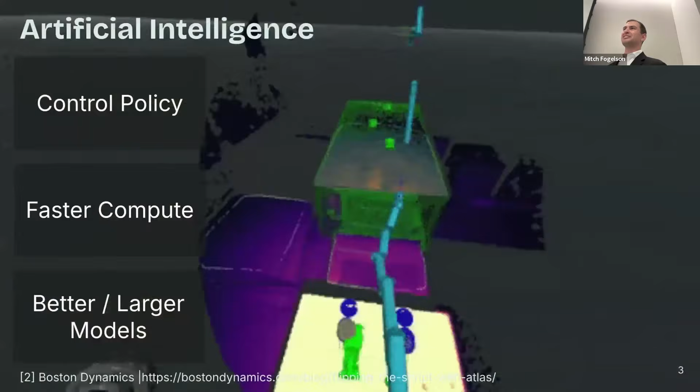I'm going to show you my favorite biological inspiration video of this fish swimming upstream. Now, the kicker is that the fish is dead. There's no control policy, there's no actuation, there's no models. And yet this amazing behavior emerges from its interaction with the environment. This is what I'll refer to as physical intelligence. These behaviors emerge from geometry, structure, and composition for animals to be able to be efficient and achieve these incredible feats.

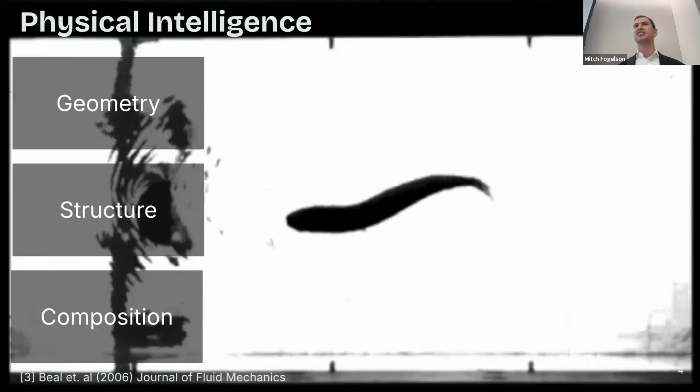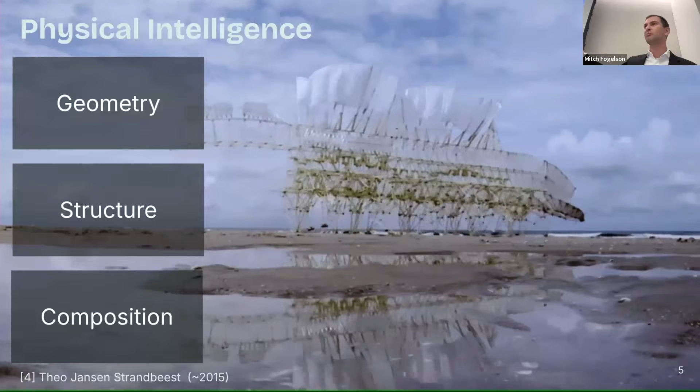One amazing example of this physical intelligence is realized through Theo Jansen's walking sculptures, the Strandbeest. These are systems that are powered only by wind, but effortlessly walk across the beaches, which is still an advanced problem for robotic systems today. They achieve this through these amazing linkage systems that effortlessly and naturally create these gaits that are able to traverse this difficult terrain.

Now, as I mentioned, physical intelligence is only half of the story. When we combine physical intelligence with artificial intelligence, like the Salto robot developed at UC Berkeley, we can see these systems jump to new heights, bounce off of walls, reorient themselves mid-air, and land with precision.

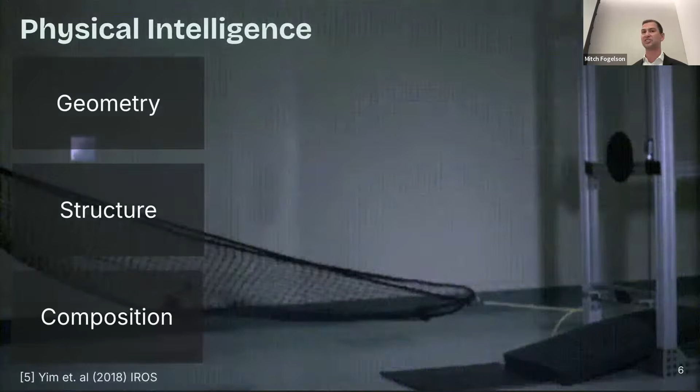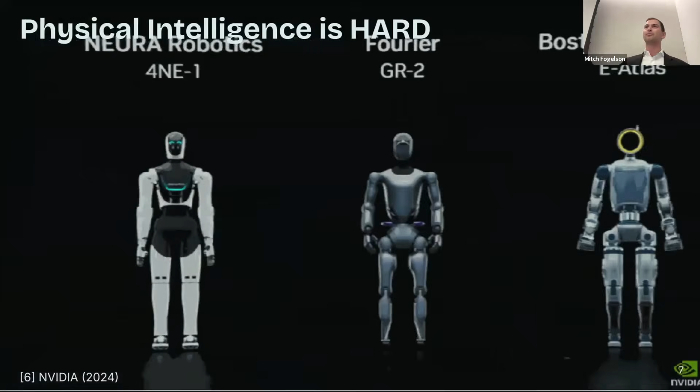So why don't we see more interesting and diverse sets of robotic designs in the real world? Why is everyone converging to these simplified forms of humans and dogs? It's because physical intelligence is hard. The composition of the structures and the boundary conditions that they provide create challenges for engineers to develop these systems.

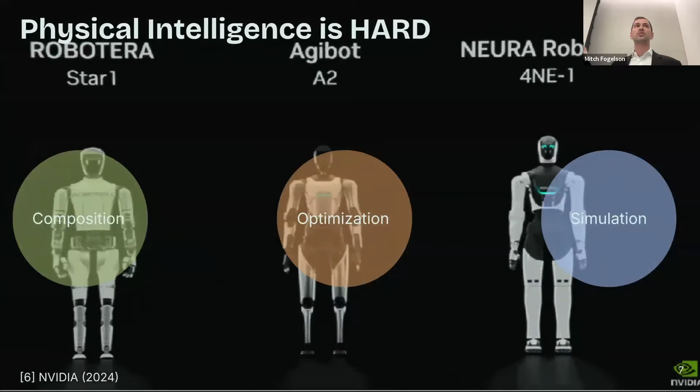The optimization algorithms that we have don't scale well to the high dimensional design problems that persist. And the simulation tools that have been developed can only support these simplified robotic models, and so they can't handle the complex designs from the Salto or the Strandbeest.

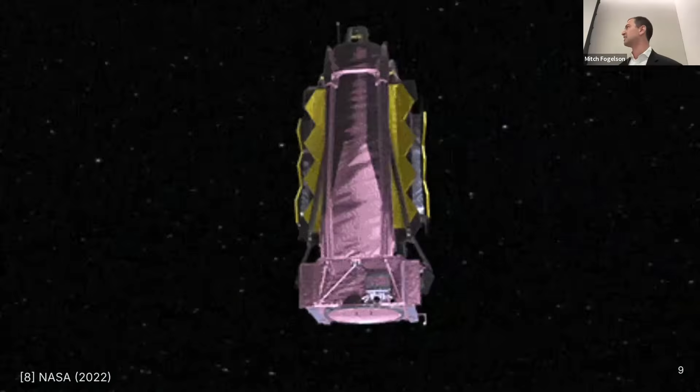Where we do see some interesting developments in physical intelligence is in the outer space realm, due to the harsh constraints and the specific tasks that we need. This is realized through the amazing development of James Webb, that deploys to the size of a tennis court, and its segmented mirrors and optical instruments deploy with precision using these linkage-based structures.

Now, it wasn't that James Webb came without any faults. There was tons of iteration and manual testing, making sure that all of these systems were going to succeed, as we can't have human intervention when we get into outer space. And even with all of this, there was over 100 single point failures that could have caused the mission to fail completely. The development of James Webb was 14 years over the timeline and $9 billion over budget.

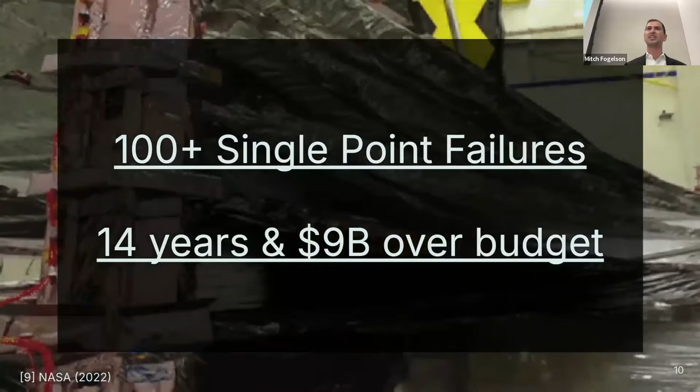So how can we get our space projects on time and under budget, and support the design engineers that are developing these next generation systems? That's where we'll be leveraging design optimization. These are tools where we leverage algorithms to be able to support the engineer in developing, testing, and analyzing structures that could be used for next generation systems.

We're going to leverage this kind of standard mathematical formulation to describe this broader set of problems. And I know everyone's eyes just glazed over when we added some math and there's no more videos. So let's walk through what optimization is together.

We're in effort trying to minimize or maximize some task, or goal, or objective. And in the real world, we have constraints. We have to obey the laws of physics or the design geometries. But we also have these knobs that we can turn to find these solutions. We've got continuous parameters, which are these smooth knobs where we can pick any possible value between infinite choices. And we've got these discrete parameters that make these jumps between different possibilities.

And so a lot of my family just came from Indianapolis and went to the recent Indy 500 race. So I thought I would ground some examples of design optimization in something that they might understand more clearly.

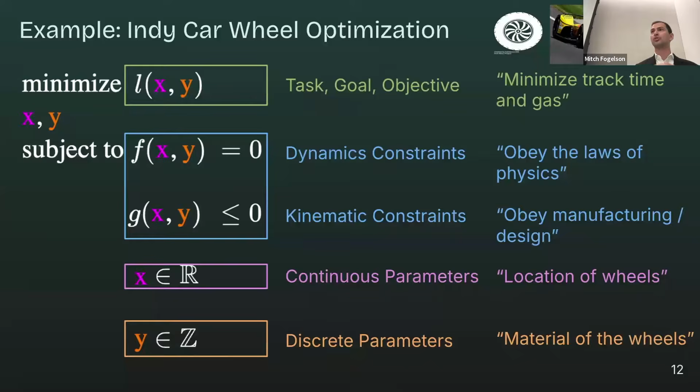An Indy car team trying to optimize a wheel for the upcoming race might want to minimize track time and gas, making sure that the design obeys the laws of physics and the manufacturing and design limitations set forth by the competition. Some of the parameters the engineer might use include the location of the wheels—can we extend the wheelbase or widen it—or discrete parameters like the material of the wheels. Like if it's rainy, like it was today, do we need to use a different tread? And so those are the choices we have to make.

Another quick example: looking at suspension design, the designers may need to obey different constraints like the linkage degrees of freedom, the link lengths, and the linkage configuration.

And so this seems pretty easy, right? I can write this problem in this formulation and hopefully we can use existing solvers that just pop out the answer. But actually there are many challenges with design optimization, particularly when we introduce these discrete parameters.

The problem can explode computationally and lead to what we call NP-hard, which literally means it can take forever for us to find the optimal solution. So in these cases, we want to find efficient solutions that satisfy all of our constraints and help the engineer move forward.

The simulation tools we use to obey the laws of physics can't handle the complex linkage mechanisms from the Salto and the Jansen robot, leaving us with these simplified serial chain structures that rely more heavily on the software to allow the agility.

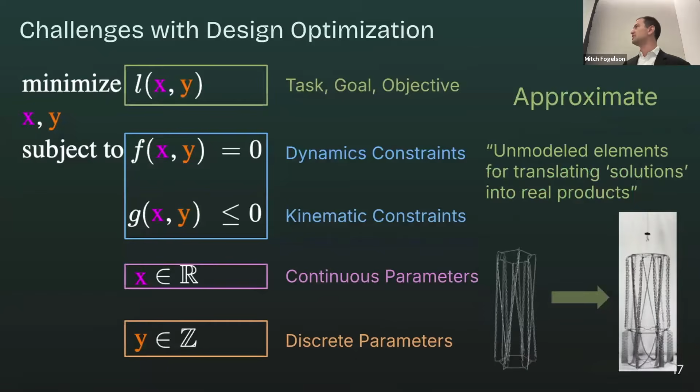And then finally, the biggest problem with optimization is that they're approximate by nature. So when we need to translate the solutions into a realized product, there are many gaps because of unmodeled aspects. And this leads me to my thesis statement.

Advances in robotic mechanical design through linkage-based structures offer new capabilities and applications. To make these designs more widespread, contributions are needed in their composition, their optimization, and their simulation.

This work demonstrates how hierarchical composition enables mechanically stiff structures with high extension ratios, how the novel optimization techniques we propose can find high-dimensional, task-driven designs that satisfy physical constraints, and how we can leverage data in differentiable simulation to provide new digital twin tools, modeling transient behaviors and phenomena such as jamming.

Over the past five years, I've been very lucky and fortunate to publish works in a variety of robotic and aerospace conferences and journals. Today I'll be talking about many of them to show you how they come together in an effort to push forward the advancements of designing physically intelligent systems through linkage-based structures.

So let's start with the math up front and look at scalable optimization formulations for actuator placement problems.

In this work, we're going to be looking at the example of James Webb seeking to point at the various stars and galaxies we wanted to observe once it's deployed in space. We presented a new method for solving these problems called CAPO, which is control and actuator placement optimization.

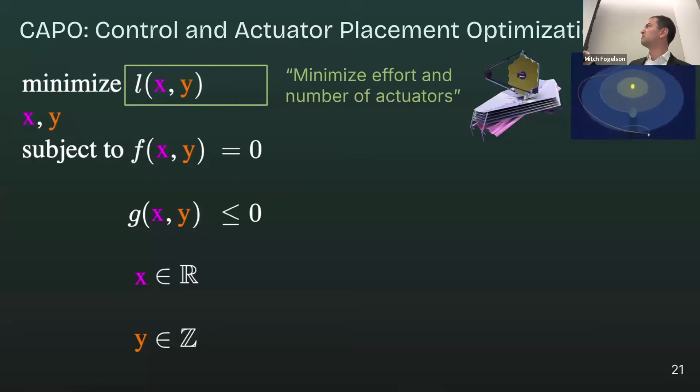So just to ground this in mathematical roots again, we're seeking to minimize the effort and number of actuators so that we can support longer missions and reduce weight and cost. We want to make sure that our design obeys the laws of physics and any thrust and design limitations.

The knobs we can turn in this optimization problem belong to the state trajectory, control input, location of the actuators, as well as the number and type of actuators. What we'd like to get out is an actuator placement and a control policy that can achieve the design tasks set forth by the engineer.

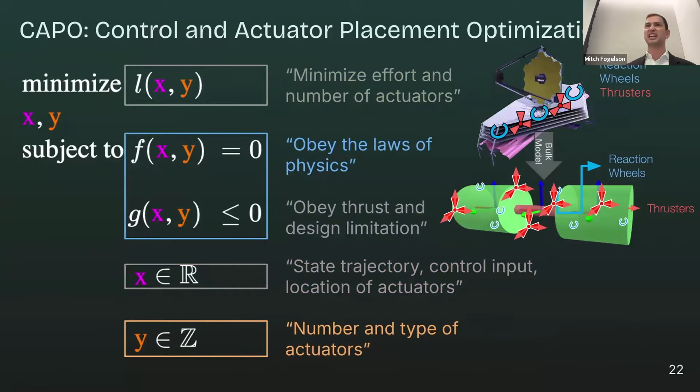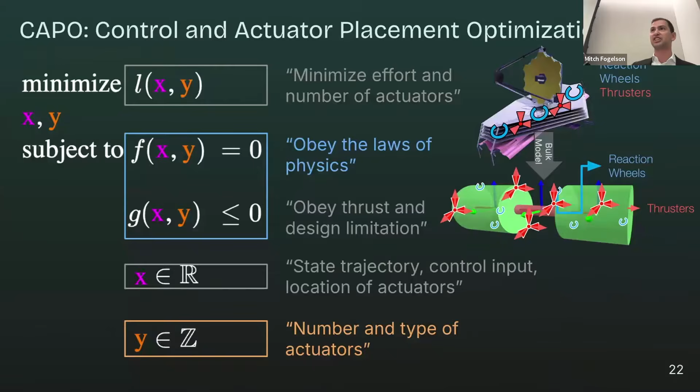So we make a couple of assumptions in this problem to simplify and make it tractable for the algorithm. The first is that we assume this complicated structure is represented as a bulk model of rigid bodies connected by flexible joints, and that there's a dense set of actuators placed along those bodies a priori by the designer. We want to find the minimum set of these actuators that can achieve these particular tasks.

So while this kind of general formulation was nice, I think it would be helpful to dive a little bit more specific into the exact problem that we're solving here. And don't worry, we'll continue to walk through this. There'll never be math without any sort of pictures or descriptions.

So in this particular problem, we represent the state as the position, orientation, and velocities of each of these rigid bodies. We can update the control effort of all potential actuators. We introduce this actuator selector vector, which tells us, does an actuator exist or does it not exist, and the actuator positions. Our nonlinear dynamics is us saying we need to obey the laws of physics, and there are inequality constraints related to thrust limits or other design issues.

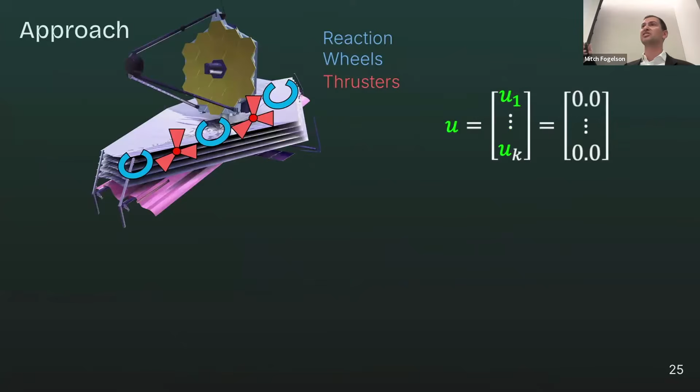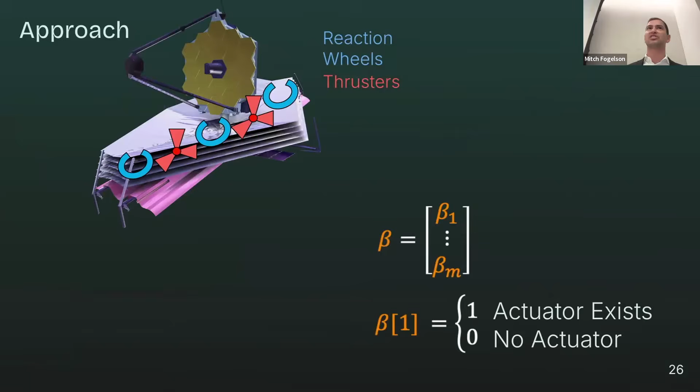And we need to make sure that either actuators do exist, so they're equal to 1, or they don't exist, they're equal to 0. We could also have written that an actuator doesn't exist by looking at the time-varying control effort and setting it equal to 0. However, this can be quite hard to write down as a constraint, and so that's where we introduce this beta term to allow us to easily decouple the actuator selection and control problem.

Now, to solve that original formulation for high dimensions can take forever. And so what we do is we make several relaxations so that we can solve the problem more easily, showing that we can still find constraint-satisfying solutions. To that end, we first relax that existence and non-existence constraint and say it can be anywhere between existence and non-existence to make sure that we're able to then support the reduction of the actuators and project the solution back onto the original problem. We introduce this regularization term, which through the gradient helps us drive parameters down to 0 when they're not needed and somewhere non-zero when they are being used. This is called the lasso trick.

However, when we get the solution from that formulation, we need to make sure that it satisfies the original problem of existence and non-existence. And what we can do is we can project by rounding up those values. So first we project the control inputs through the actuator selector vector, and then we can round up our beta, making sure that the actuators exist or don't exist again. And this projection we show still satisfies those original nonlinear dynamics. And so we are happy.

However, if we just optimize over one particular task, like pointing at one galaxy, now that design that emerges might overfit to that specific problem. If there's variations or alternative tasks that we want to do, we need to kind of look at a set of the potential opportunities, and we can leverage the sparsity of the problem to make sure that we can still solve these optimization problems very efficiently.

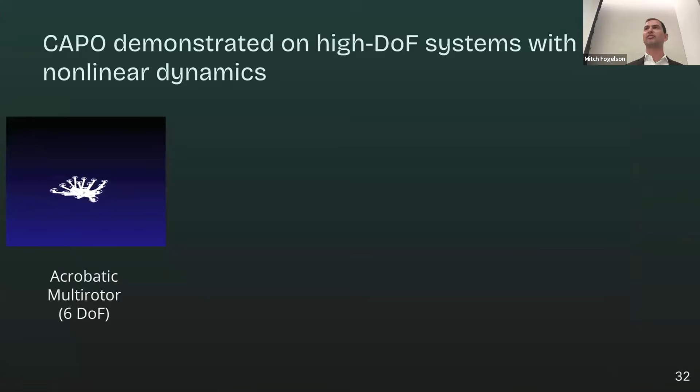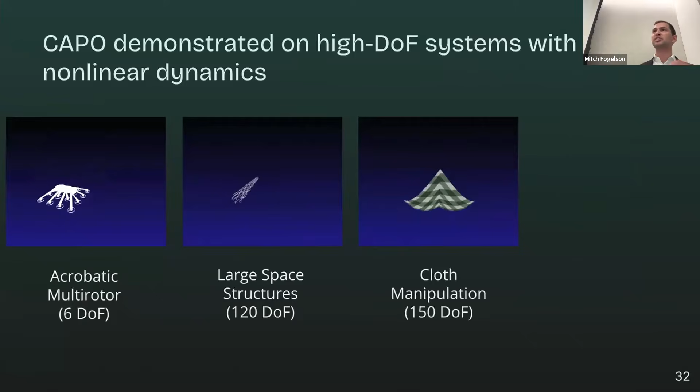So we compare our method, CAPO, against a genetic algorithm and mixed integer nonlinear program. And what we'll show is that CAPO is the only scalable solution for these high-dimensional problems. Now, this formulation is amazing because it generalizes over more tasks than just the James Webb pointing problem. It works for a variety of different design optimization problems, like an acrobatic multirotor, design of actuator placement for a large flexible space structure, even can be shown to work for configuring robotic arms for manipulating cloth and designing a soft robotic swimmer.

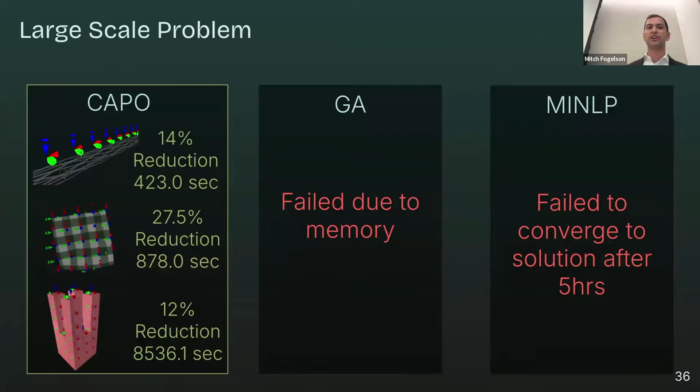On the small scale problems, CAPO is 300 times faster than the other approaches, but what you'll see is that it doesn't always find the sparsest configuration of designs, and that's okay because CAPO is not the silver bullet for all design optimization problems. Where it's kind of specializing is in these large scale problems where there's lots of discrete choices between the number and types of actuators. And we see that CAPO finds a sparsification of around 15 to 30%, where the other algorithms fail to propose any solutions to these high dimensional problems.

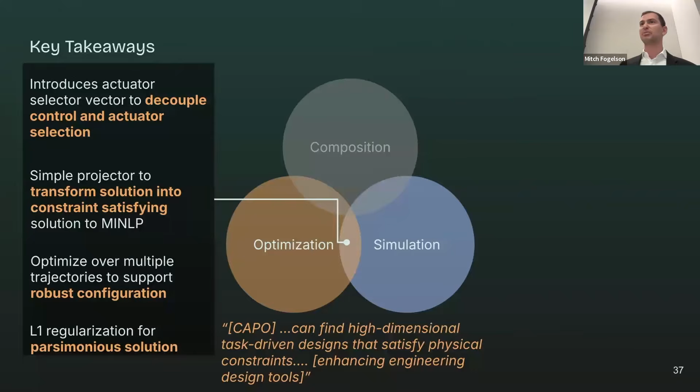And so the key takeaways from this initial work is that by introducing this discrete parameter, we can decouple the control optimization and actuator placement problem. We can solve these problems with a relaxed method, but still satisfy the original constraints of actuators existing and non-existing, we can identify robust configurations by optimizing over multiple trajectories, and we find a sparsification of these solutions. And this kind of leads back to my initial thesis statement showing that CAPO can find high-dimensional task-driven designs, enhancing the engineering capabilities for designing these complex systems. And it works on a variety of different design optimization problems, not just the single problem that we presented today.

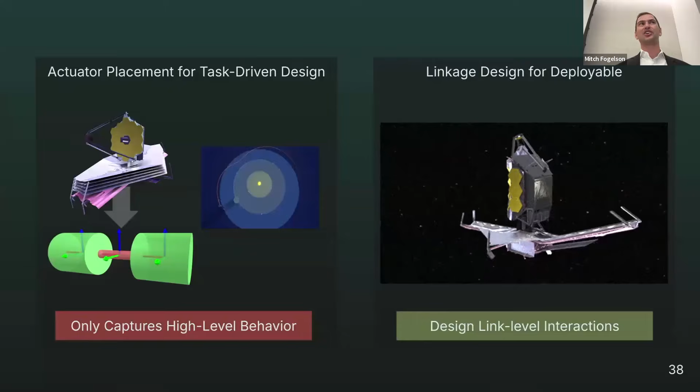So while CAPO was amazing with its actuator placement task, it only captures this high-level behavior because of the bulk modeling and the kind of specifications of the problem. But really, the interesting aspect of James Webb was all of its deployment capabilities and the link-level interactions that occur. And so in this next work, I'll be presenting an efficient RL-based optimization approach for large-scale linkage graph optimization. This work was published in the Journal of Mechanical Design and was awarded the ASME JMD Editor's Choice Paper Award in 2023.

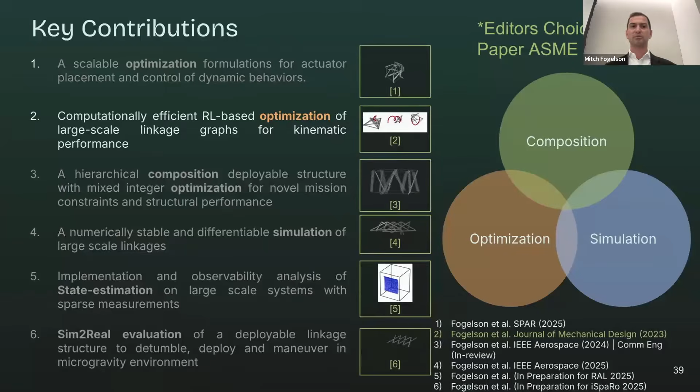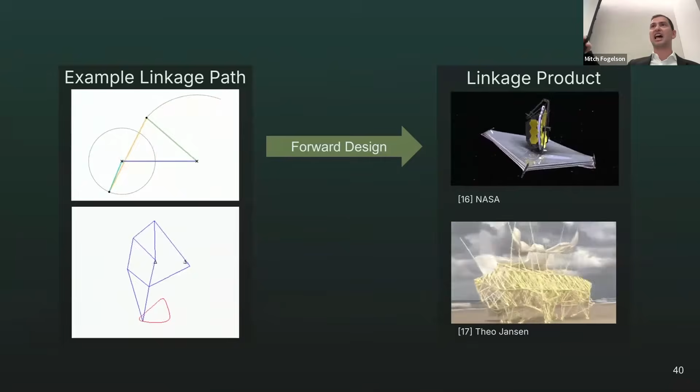So linkages, like I have many in front of me here, are these systems that translate rotational motion into some sort of desired output. We've seen these in our windshield wipers or other sorts of everyday systems. However, they're also used in the design of these complicated systems like the James Webb Telescope or the Strandbeest. Now, the forward design is I have this linkage and I'm generating this output path for a particular task. But typically, we know what the output path wants to look like, but we don't know what the linkage graph to generate that output will look like. And this is called path synthesis in the linkage design world.

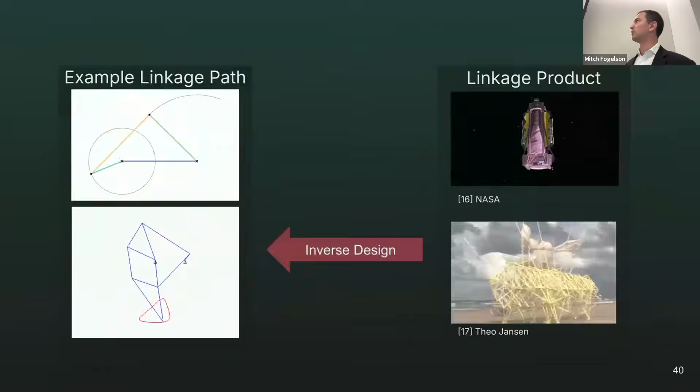And we can set up this problem again in this optimization formulation. In this case, we present GCP-HOLO, a high-order linkage graph optimization. We have our 4-bar linkage here, which is driven by a single motor actuator and generates this coupler path. And what we're trying to do is minimize the distance from the coupler to some sort of goal design that the engineer might put forward. We need to make sure that our linkage obeys the degrees of freedom. It's only a one input system and obeys all the kinematic constraints, meaning that it doesn't pull itself apart or break during the general motion.

In this problem, we can move the different revolute joints that are these little circles connected by those rigid elements. And we can also change the number and connectivity of these elements that construct the linkage graph. Now, the linkage is a real physical system, but we can represent it as a mathematical graph, which relies on two matrices. We have this adjacency matrix, which has a bunch of zeros and ones that tells us how all of these revolute joints are connected with each other, and this node feature vector called V, which is the time-varying position of all of the revolute joints.

We need to make sure that our linkage graph satisfies these constraints, and you might think we can apply the same algorithm we did for CAPO to a problem like this, but those specific tricks and heuristics do not necessarily translate to this problem easily. And so we actually used a different approach for solving this through sampling-based methods, which allows us to satisfy these constraints very quickly, and we can evaluate this goal much more efficiently, especially as the number of connectivity and links grows, the optimization problem balloons and can take forever to find efficient solutions.

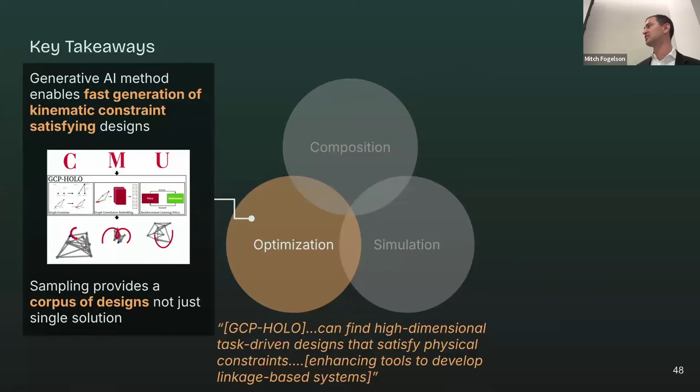And so going back to our Venn diagram of how we can enhance physically intelligent systems, we see that GCP-HOLO can find these high-dimensional task-driven linkages, supporting the development of linkage-based systems, hopefully designing more robots that leap off of walls and look like the Salto, or walk on beaches like the Jansen robot, or developing these next-generation deployable space systems.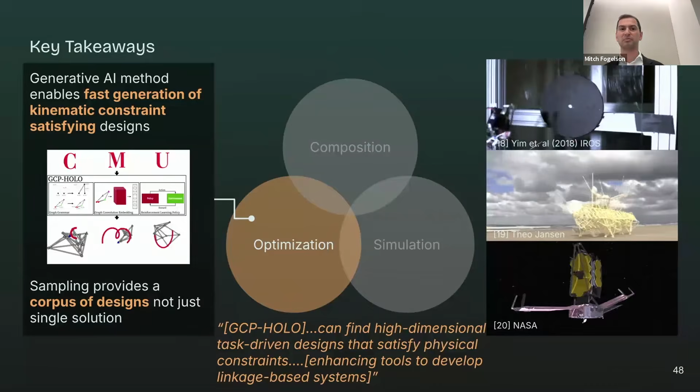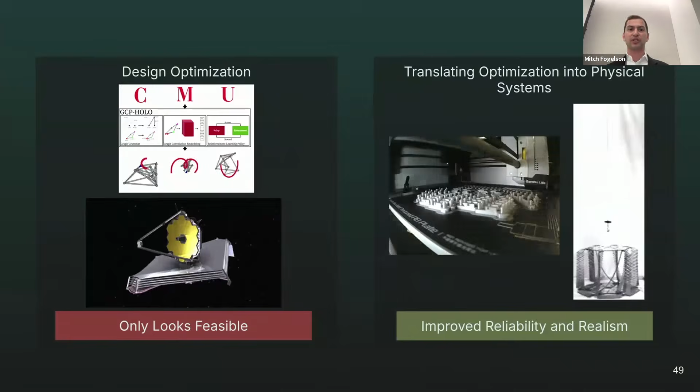So all of the math mostly is done now. We've gone through the tough design optimization, but the solutions that we found only look feasible. They don't necessarily translate to the real world. And so this next half of the talk is going to be, how do we support the translation of these optimization solutions into physical systems, improving the reliability and the realism of our products?

This next work was in collaboration with my dear friend and collaborator, Dr. Sawyer Thomas, on a hierarchical composition and integer optimization for novel mission constraints. This work was presented at the IEEE Aerospace Conference, and a journal version is under review at Communication Engineering.

You might have heard about the astronauts that were stuck in space recently in the February mission that caused them to be brought back home. There was a lot of drama in the news. However, the most significant thing was the health concerns of the astronauts extending their stay in microgravity environments. It degrades our bones, our eyes, our ears, and there's major concerns. The longest an astronaut has ever stayed in microgravity is over a year, and it was a Russian cosmonaut that got stuck during the fall of the Soviet Union.

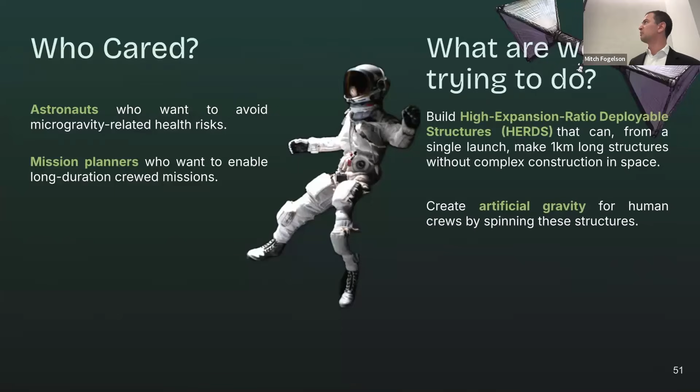So to support astronauts and mission planners for these long duration missions, for example, going to Mars takes 7 months just one way. And so how are we going to be able to support the human capital and human people that we are sending on these difficult and important missions, and making sure that they're safe along the way? And so to that end, we need to create an artificial gravity structure through a large deployable mechanism, which we'll talk about now. And just for context, we're talking on the scale of 45 times the size of the James Webb Telescope.

So artificial gravity sounds like science fiction, but it's really just the result of centripetal force. We've probably all been on a roller coaster and felt how the body feels as it's spun around, being pushed back on itself. And what really is happening there is just we need to make sure that the spinning doesn't also cause residual nausea or disorientation. And so to be able to create enough acceleration but spin slow enough, human factors research shows that we need to be at around 1 rotation per minute, with 2 being the absolute limit for humans to sustain long duration spinning effects.

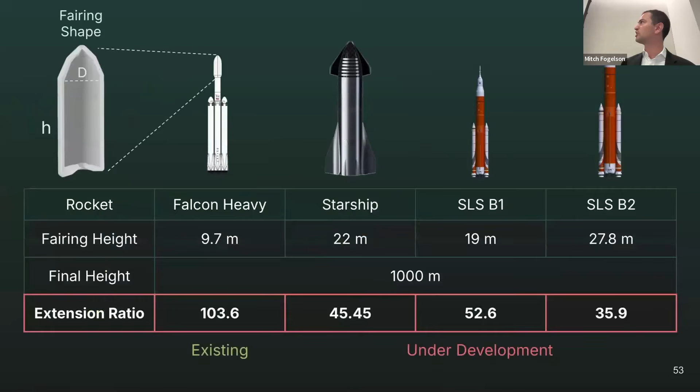Now, to fit a kilometer scale structure in existing or under development future space vehicles, we need it to collapse or deploy on the order of 30 to 100 times its full size, as these rockets are quite large, but the stowable space is actually much smaller.

So we looked at the history of deployable space structures, from inflatables, elastic, pantographic structures, telescoping tubes, and we saw that none of them were really able to satisfy all of the harsh requirements of this particular problem. And so we developed this hierarchical approach that combines multiple deployable structures together, which we call HERDS.

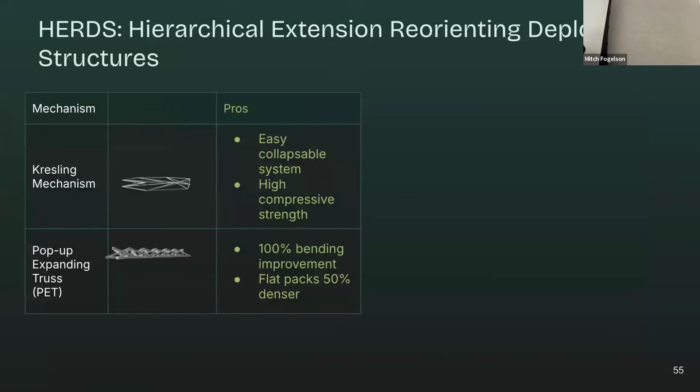Now, there's many ways that you can develop HERDS, but we'll show a couple of examples today. The first, we combine the combination of the Kresling mechanism, which has a twist extension coupling. Feel free to pass this around, with a pop-up expanding truss, which collapses to 50% the size of a scissor-based system, with improvement of 100% in the bending stiffness of the structure.

And when we combine them together, what we're able to achieve, and I'll lift this up so people in the back can see, is we get this twist extension from the Kresling and the physical extension from the scissor mechanism, which gives us these really efficient stowing behaviors that allow us to achieve these 50 to 100x extension ratios that we're looking for.

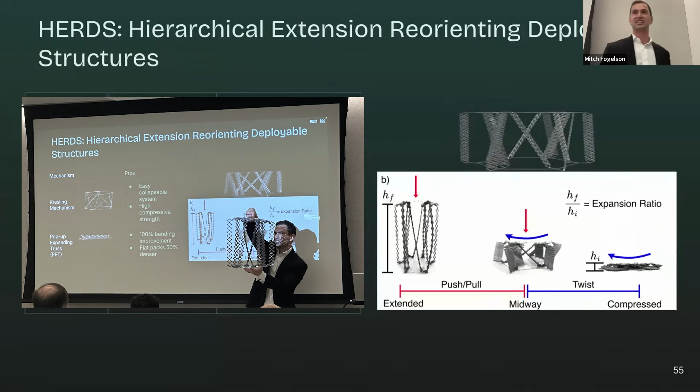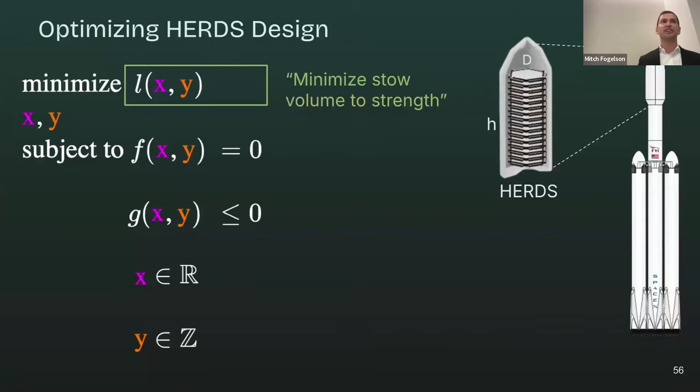So because we've composed these 2 independent deployable systems together, we now have more knobs to tune and change. And so the engineer can then optimize the configuration of these independent structures to satisfy the various constraints and goals. So we want to maximize or minimize the stow volume to the strength, while obeying the fairing diameter and height and mass limits, and obeying all the other potential mission constraints that we're looking for. We can vary the link lengths and thicknesses and the number of scissor units in the Kresling mechanism.

Now, we can't necessarily test the strength of these structures. We usually do that through FEA approaches, which don't naturally fit into gradient-based optimization. So we introduce this heuristic of minimizing the member aspect ratio, which should guide the optimization towards stiffer solutions. And when we look at the hierarchical structure compared to its independent components, we do see an improvement of member aspect ratio of the order of 4 to 12 times.

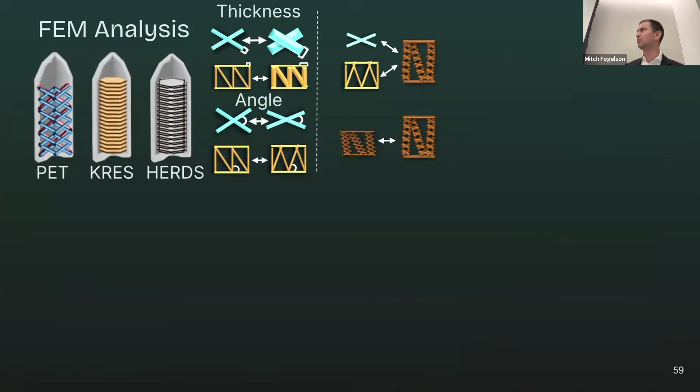But as I mentioned, we do need to understand the actual strength of this structure. This is only a proxy for strength. And so we did an exhaustive design sweep over the thickness and deployment angle, as well as the member subcomponents. We compared the structures in compression, tension, torsion, and bending. And what we see is that the high extension ratio structures where we're able to achieve the kilometer scale deployment, the HERDS systems are orders of magnitude better than the non-hierarchical approaches.

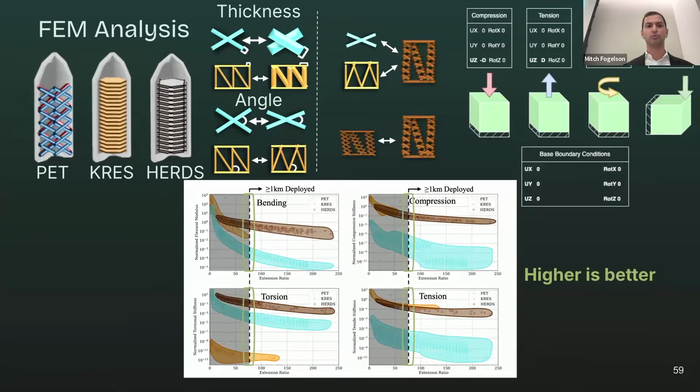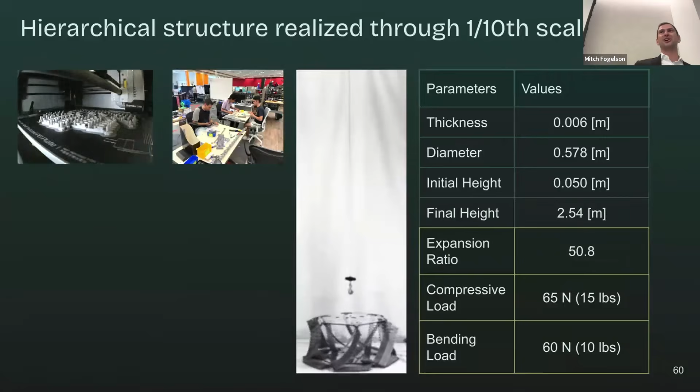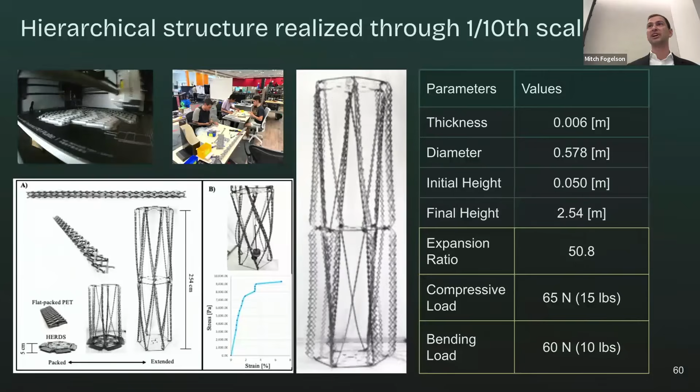But as I mentioned, we need to translate these solutions into the real world. And so we built a 1/10 scale prototype of the physical system, which consisted of 1,500 individual 3D printed components that were meticulously hand assembled by many of my lab mates who are here today. So thank you so much for allowing us to achieve this amazing structure that goes from 2 inches to on the order of 8 feet tall when fully extended. And when the system is locked and then loaded, we're able to support 15 pounds of compressive load and 10 pounds in bending, which is pretty impressive for a 3D printed structure.

In addition, many of you see the kind of advancements we've made to these structures since then, and we definitely can hit the 100x extension ratio needed for existing space vehicles today.

So through hierarchy, we're able to extend the capabilities of these linkage-based systems, showing that the composition provides a high strength to stowage ratio. We can leverage our design optimization tools to help the engineer design these systems for specific mission constraints and downstream tasks. And the realization of these physical systems demonstrates how they're able to perform in the real world, translating these optimized solutions into physical products. Leading back to my thesis statement, how hierarchical composition enables these mechanically stiff structures.

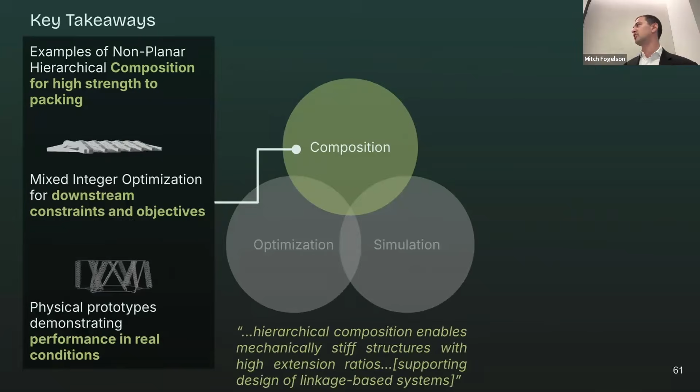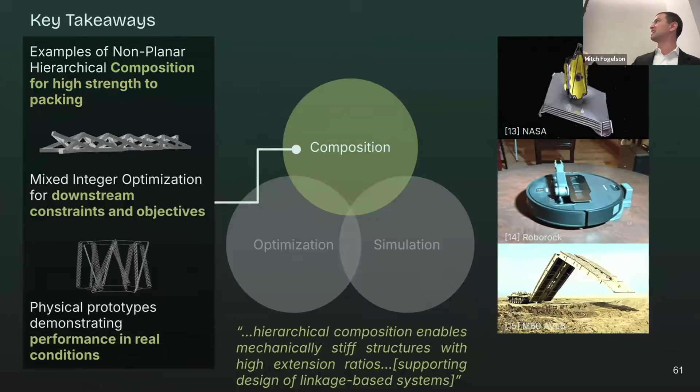Now, for next generation design engineers, you don't have to just think about this simple problem of the expanding deployable pole. We can think about other sorts of interesting ways to apply hierarchical extension through next generation telescopes, or even as the basis for ultra compact robotic arms and grippers, or for disaster and defense applications for generating collapsible bridges.

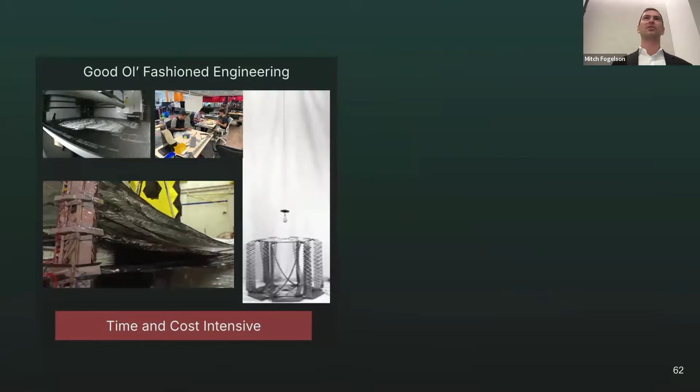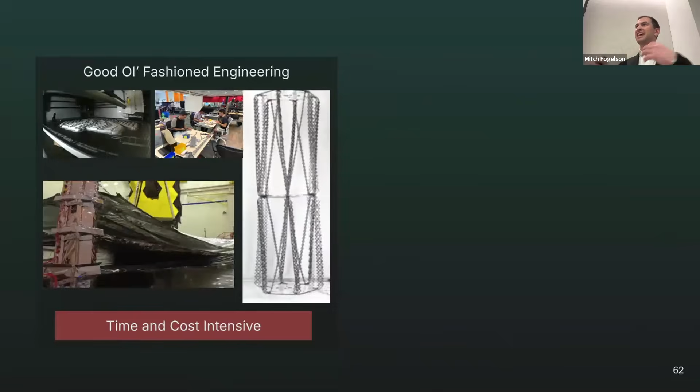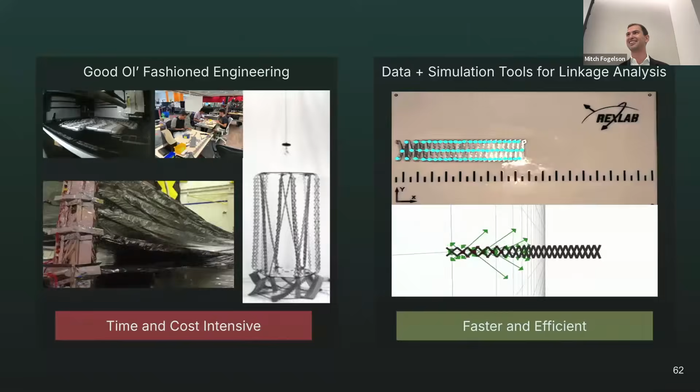Like the James Webb Telescope, this required a lot of that good old-fashioned engineering, which is cost and time intensive. We were wondering, how can we leverage some of that testing to extend our ability to evaluate these systems more efficiently? We wanted to combine data and simulations to have these tools extend the testing of linkage analysis. This will be faster, more efficient, and safer. We can't always test our systems to the extreme. We're not building two James Webb telescopes to destroy one and see how the other performs in space.

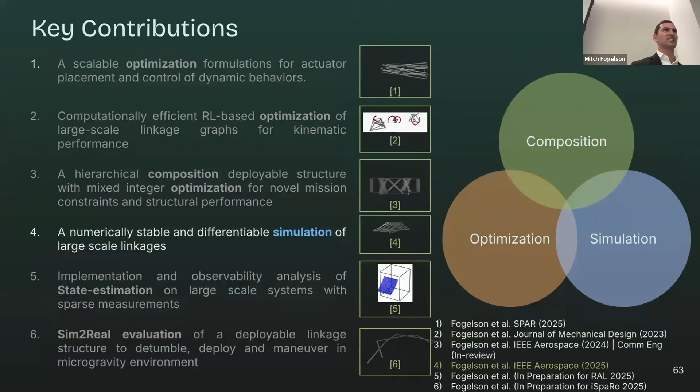Now, for those that don't know, IEEE Aerospace always takes place at Big Sky, Montana. And while I did not win the Best Paper Award, I did receive the coveted 3rd place in the downhill ski competition.

So linkages, as we've heard throughout this talk, have many advantages. They're scale and material agnostic. They're simple to manufacture and assemble. They don't rely on material strain, so we can model them easily. And they're safe and prolific.

We've seen many examples from retractable roofs to scissor lifts in construction, but still many engineers avoid them for space applications because there's force synchronization issues or a large number of parts. There's jamming concerns and joint friction uncertainty.

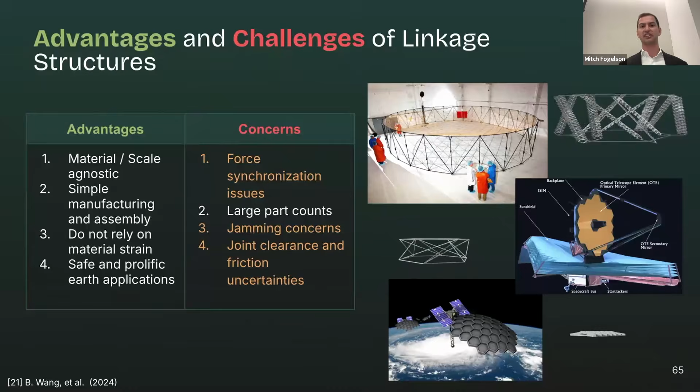So what we look at is how can we leverage this data and simulation tools to understand the coupling of these specific parameters that emerge when we manufacture these structures, and how can we use that to help engineers design next generation iterations? Now, deployables are really critical for space applications, as they're usually related to the power and communications of the systems, and failures in deployables can cause the whole mission to fail, leading to billions of dollars in losses.

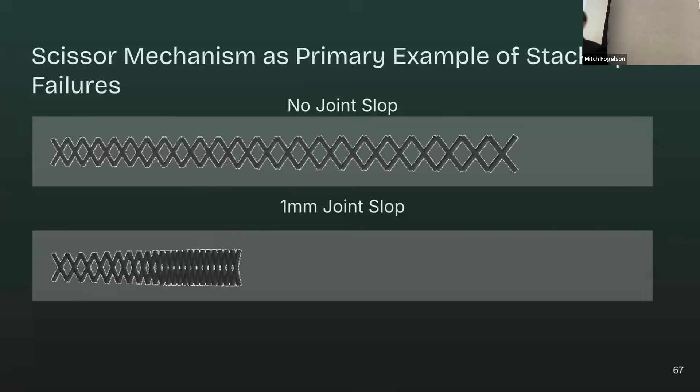One example of these potential failures is through the stack up of the joint clearance and joint friction, which we can see here simply through the scissor mechanism. I'll pass around the scissor units so you can feel the joint clearance and the flexibility. When we have this idealized scissor, everything opens up symmetrically and smoothly. However, when we add some joint slop to the system, we see additional resistance, asymmetric deployment, and in many cases, many of the links don't deploy at all, leading to the potential failure of space missions.

So we developed this framework that allows engineers to leverage the data and simulation tools to evaluate linkage systems on downstream tasks, making sure that we can understand if jamming is going to occur and how the force and torque requirements might affect the deployment, and then ideally leveraging that data back into the original design to iterate over these next generation systems.

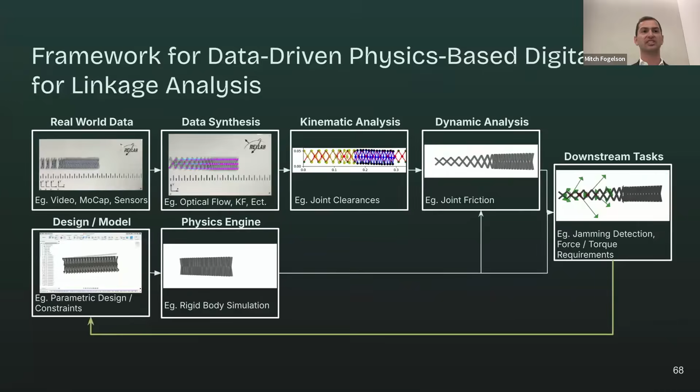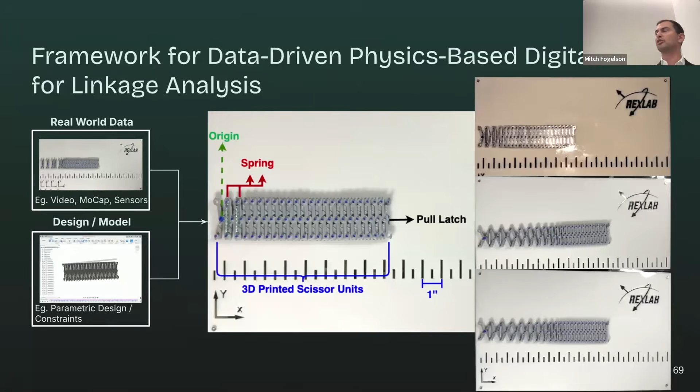To that end, we take our physical system, this flexible scissor model that was 3D printed, and because of the irregularities in 3D printers and the tolerances we can achieve, we get this kind of interesting deployment behavior. We added a couple of springs on our test setup to repeatedly and reliably capture data across multiple different trials.

We can then extract that transitory information of how the scissor mechanism deploys using computer vision algorithms or other sorts of methods. And then from that, we can extract these state trajectory and control inputs, where we can hopefully learn the emergence of certain parameters like the joint clearance, X limit and Y limit, and any sort of dry friction parameters.

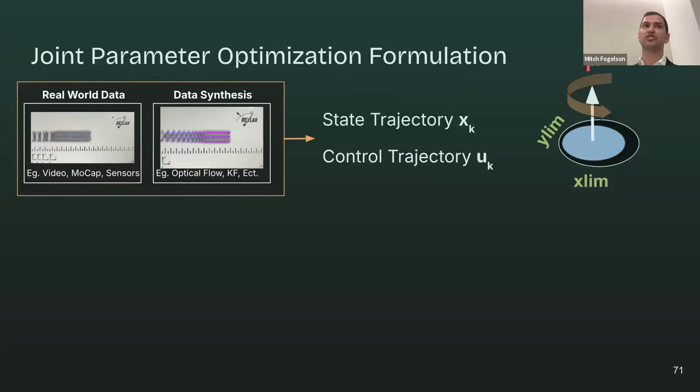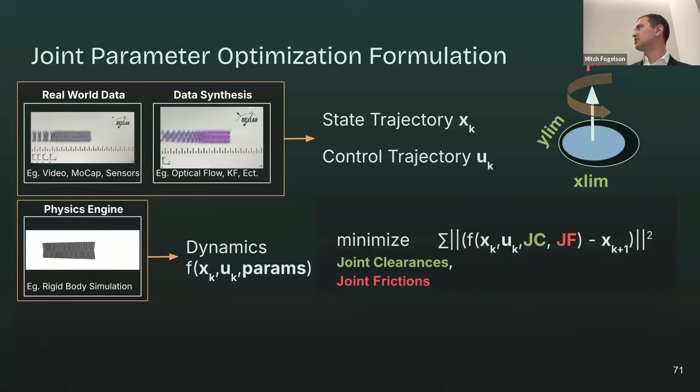Using our differentiable simulator, we can then play around with the different parameters to see how we can most closely match the real world data and the simulated data. More explicitly, we can write this as an optimization function, minimizing those differences over time.

Now, as I said at the beginning, there aren't tools that natively support these large constraints and linkage-based systems, but we extended the capabilities of some existing simulators developed in our lab at the REXLAB called Dojo that supports these full SE3 representations. It's differentiable and handles contacts and joint clearances. And so by addressing the numerical challenges related to redundant constraints and what occurs when we have lots of links in the system,

we can now simulate a large corpus of rigid body systems that were previously unmodeled. And the synthetic data shows us that our optimization quickly converges to a solution that looks very similar to the true synthetic scissor.

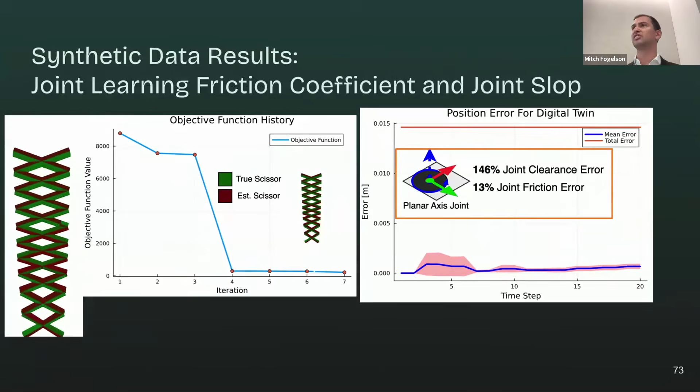However, the results don't necessarily look as promising, as the true joint clearance and true joint friction actually vary a little bit more than we would like, even though the position error of the system stays consistent over time. That's because we're finding these local minima. What we discovered is that we need to test in a more diverse set of potential deployments so that we can decouple the joint friction and joint clearance, because maybe multiple combinations of joint clearance and joint friction can derive the same deployment behavior.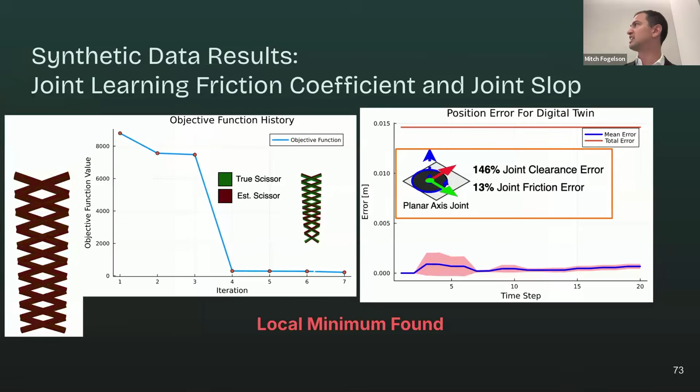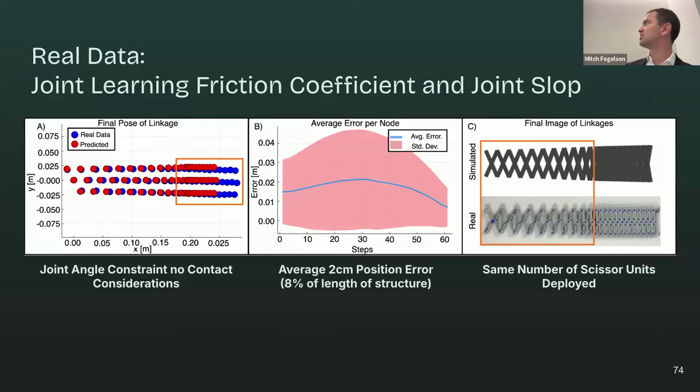When we look at the real world data, we see some more sim-to-real gap opportunities with the lack of consideration of how the links contact each other. In the simulated one, we see the system stacking much more tightly than in the physical system. But even with all of these sim-to-real errors, we only have about 2 centimeters of position error, and at least qualitatively, we have the same number of scissor units deploying between the simulated and real solution.

But what is most important about this tool is the ability to evaluate these systems in different conditions, making sure that we can understand the forces and torques, as well as any of the singular values that might occur from jamming. This pops up naturally from our simulation tool, where we can monitor the number of singular values in the system, and this will allow us to detect the jamming occurrence.

So the key takeaway is that data plus simulation allows us to support engineers' ability to safely test these systems under unseen loads and conditions, allowing us to capture joint reaction forces and joint friction that emerge from manufacturing intolerances and wear, leading back to our Venn diagram of the thesis, showing how these tools can enable the engineer to create a feedback loop of design, test, and evaluate more efficiently.

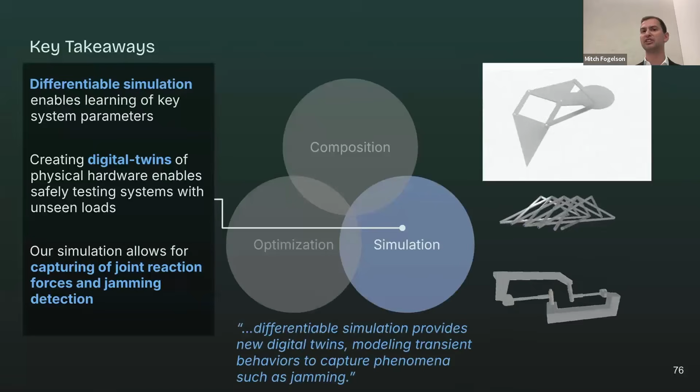And this extends to a variety of different types of deployable structures and linkage mechanisms, not just the simplified scissor unit that we tested today.

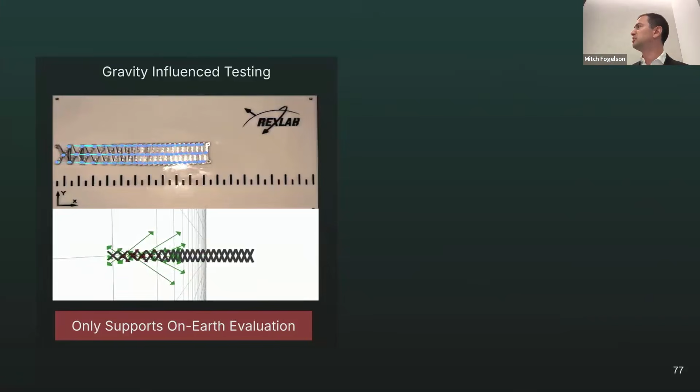And all of these tests, both the James Webb and the scissor experiment, have to usually be done on Earth, as there are people that need to interact with these systems. Gravity definitely influences a lot of these parameters, as there is the bias of where those joints are going to settle. So this particular simulation can only really show that it supports on-Earth evaluation.

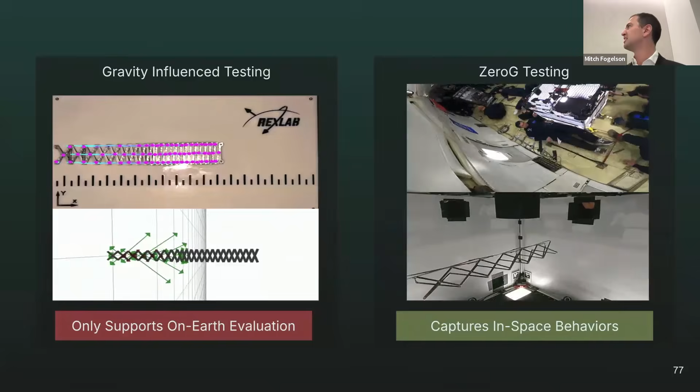But all of our systems we're hoping to deploy, and we've talked about today, are for future space systems, which will be in zero gravity environments. So we were fortunate enough to be awarded 2 research flights on this recent zero-G mission to capture these in-space behaviors in a simulated microgravity environment. This work happened just in the last month, so I'll be providing some initial results and thoughts about the data we were able to capture. This sim-to-real evaluation will be submitted to the International Space Robotics Conference this summer.

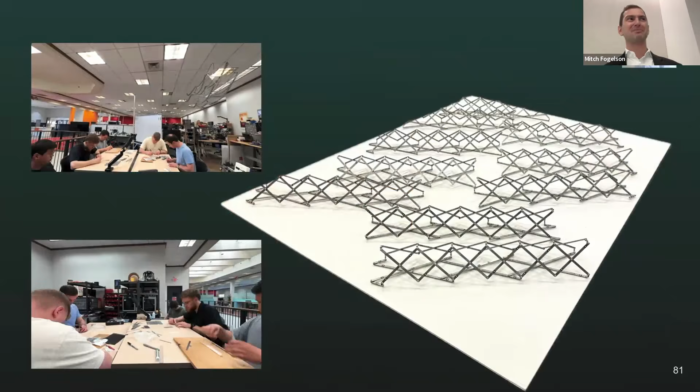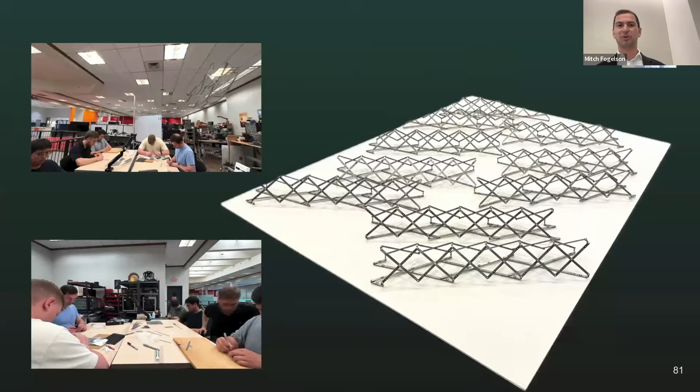Now, it wouldn't be a project of mine unless there was a build montage with a lot of amazing lab members helping me out, building 10 of these pop-up extending trusses, which relied on many hundreds of parts and thousands of stickers being placed by hand on all of these systems. But we saw that with more people, it expands exponentially. A huge thank you and shout out to my master's student that supported me, Joe Kuhl, who helped on a lot of the design of the systems and developing deployment.

So now let's take a look at some slow motion video captured from the recent experiment.

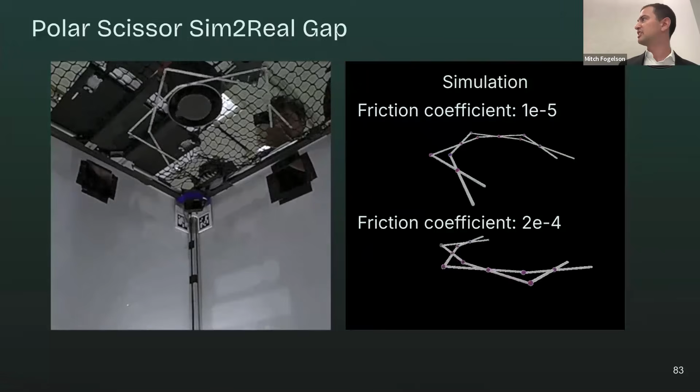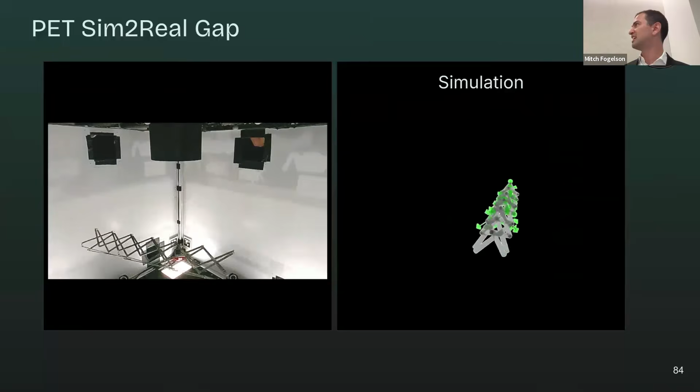And then finally, looking at this pop-up extending truss, we see the really interesting behavior right at the bottom at the end, where it reorients itself, and the same behavior emerging on the simulated model, where we can also visualize those joint reaction forces of the deployment of the system. So I'll let it play one more time before we skip past this.

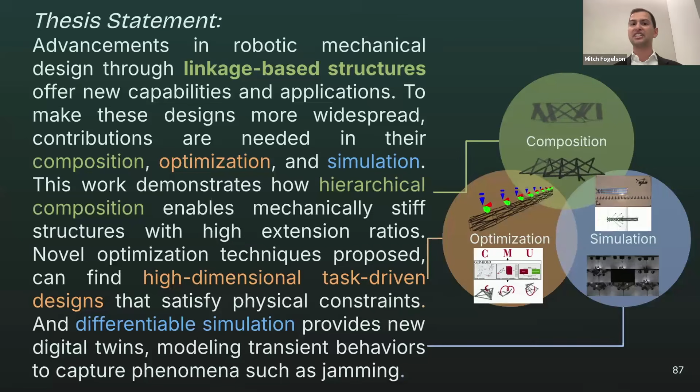So throughout this presentation, I've shared new approaches for linkage design through hierarchical composition. We've provided new methods of constraint-satisfying, efficient optimization formulations for high-dimensional design tasks. And we've shown how data and differentiable simulations can be used to enhance engineering tools and analysis for next-generation deployable systems or intelligent robots.

In space structures. So looking back at our original inspiration of the IBEX and the amazing combination of physical intelligence with artificial intelligence through the SALTO and the James Webb Telescope, I hope you can see how the work that we've done is attempting to push the field forward in developing these more physically intelligent and capable systems.